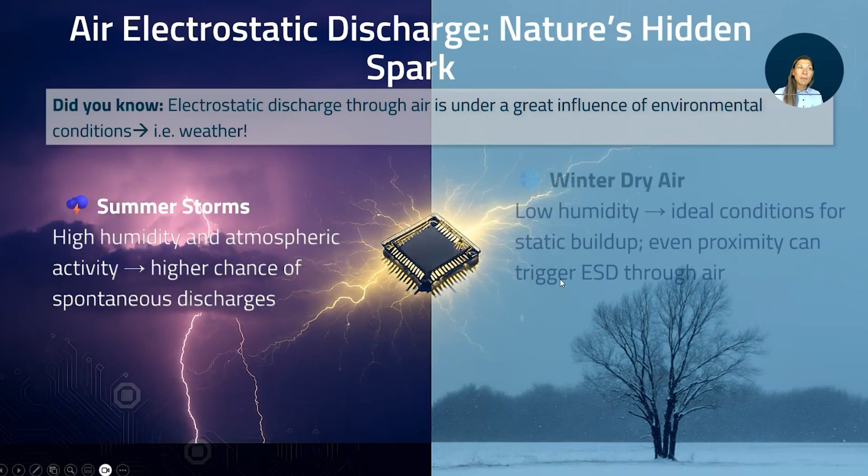Of course, while lightning strikes are quite dangerous, and can actually also be simulated using CST Studio, today I will not be talking about that topic. Today I will dedicate this time more to these kinds of smaller zaps.

If you're especially familiar with the northern climate, during winter the air can be very dry, and that presents ideal conditions for buildup of static charge. In those cases, even a very nearby approach without needing direct contact can trigger electrostatic discharge through the air. While those small zaps are not dangerous for people, unlike lightning strikes, they are devastating for sensitive electronic devices.

Which is why understanding of air ESD is essential for product development, and of course how to tackle the issues caused by it.

I would also like to recommend an excellent free white paper, which can be found on Google, and maybe Mila can also share the link, called Electrostatic Discharge by Dassault. It gives a great overview on the phenomenon and how the ESD gun, the whole ESD setup, is modeled using CST Studio. I will present that during this webinar.

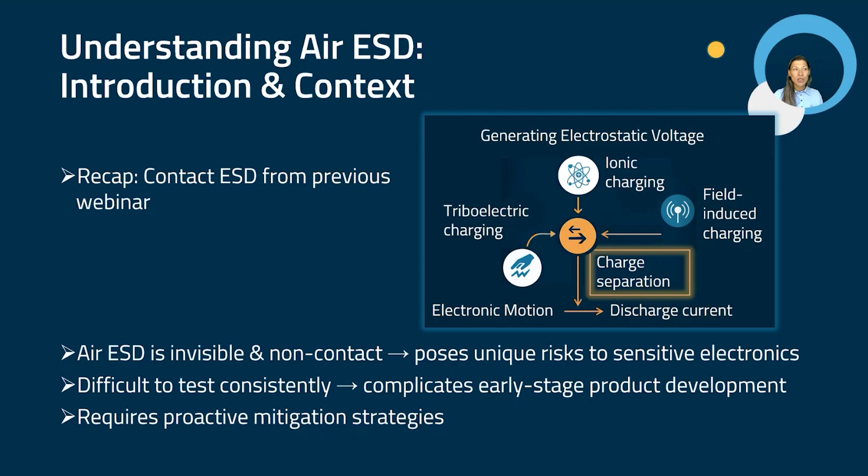Again, briefly on the physics behind air discharge. As already mentioned, electrostatic air discharge can jump across an air gap without any physical contact. And while in the basics, it's similar to contact discharge.

We have the accumulation of charge and potential difference, which means we will have an electric field established between charged objects. Now, when that field strength exceeds the breakdown voltage of air, which is a medium - perhaps you're familiar with solid-state electronics - when that breakdown occurs, it will start so-called avalanche ionization.

Breakdown voltage of air under normal conditions is 3 kilovolts per millimeter. Avalanche ionization basically means there are few free electrons in the air that exist, and they get accelerated by the influence of the electric field that now exists due to this potential difference. They will then hit other neutral particles like atoms or molecules in the air and bump out more free electrons. This starts a chain reaction, which establishes this so-called avalanche ionization, and we will have current across the air, or what we call a spark.

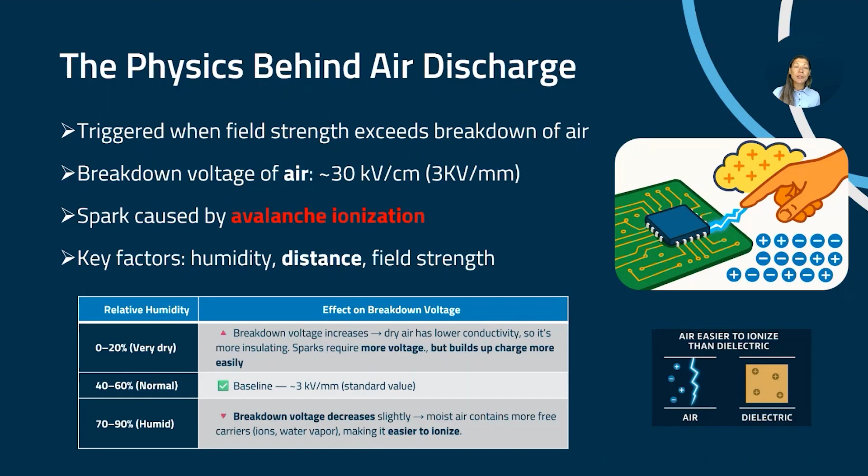So this is just a brief overview of how humidity affects testing of air ESD. As I mentioned, the nominal or normal value of humidity is between 40 and 60%, and then the breakdown voltage of air is considered to be 3 kilovolts per millimeter. However, if the air is dry under winter conditions, the breakdown voltage increases, which means the electric field strength needs to be a bit higher than this nominal value for the spark to occur.

But on the other hand, during dry conditions, the charge builds more easily. Under humid conditions, due to more moisture in the air, we have more free carriers, which is why breakdown voltage slightly decreases, meaning it's easier to ionize and start the avalanche.

Also, air in general is easier to ionize than the dielectric. If you remember, the dielectric will form dipoles, creating an inner electric field that opposes the external electric field from the charge, which is why the dielectric is more difficult to ionize and requires higher breakdown voltage.

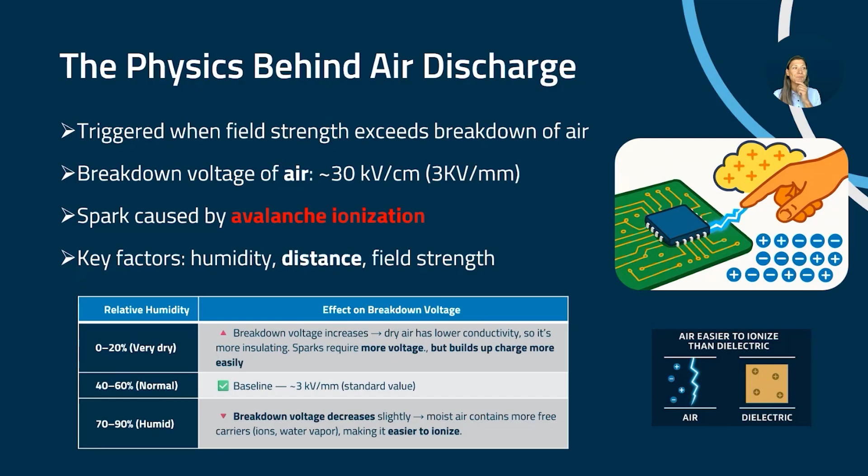Now that we know some basics in the physics, I've highlighted these key differences. The key difference is the mechanism causing it - not direct contact, but avalanche ionization across the gap without physical contact.

Normally the use case in tests is also when conductive surfaces are not accessible, in addition to accessible conductive surfaces or contacts. The trigger condition is the breakdown voltage, which makes air discharge highly sensitive to the environment - meaning less predictable and more variable, which is why it's quite challenging to measure.

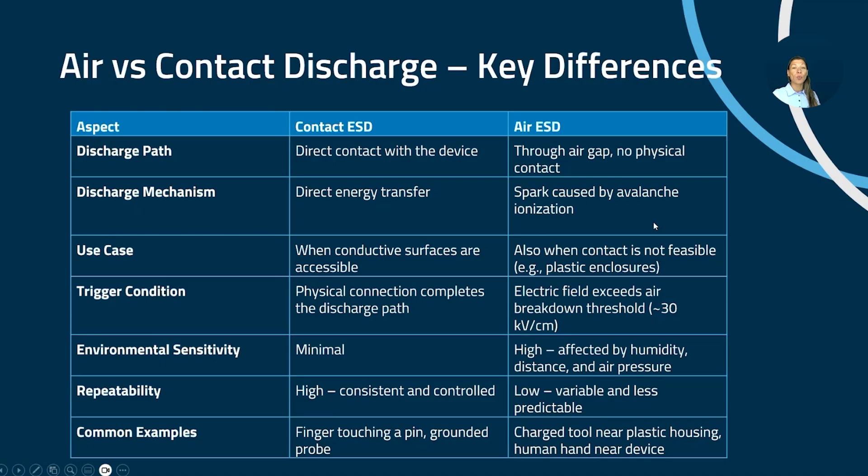When we talk about testing, I'll reference the standard IEC 61000-4-2, which covers both air and contact discharge. Products need to pass both discharge testing at a certain level. These are the main differences in terms of testing, and because of the definition of air discharge, the application scenario will also be different.

We also have slightly different equipment. For contact discharge, a sharp metallic tip is applied directly on conductive surfaces, while for air discharge, we have a rounded tip applied to the outer housing, gaps, and coated surfaces.

Naturally, the protection strategy will also differ because we have an actual physical conductive path in contact discharge - we can use grounding, low impedance paths, TVS diodes, and other ESD protection components. But for air discharge, in addition to that, we need to take care of the environment, applying methods like insulation, shielding, and gap control.

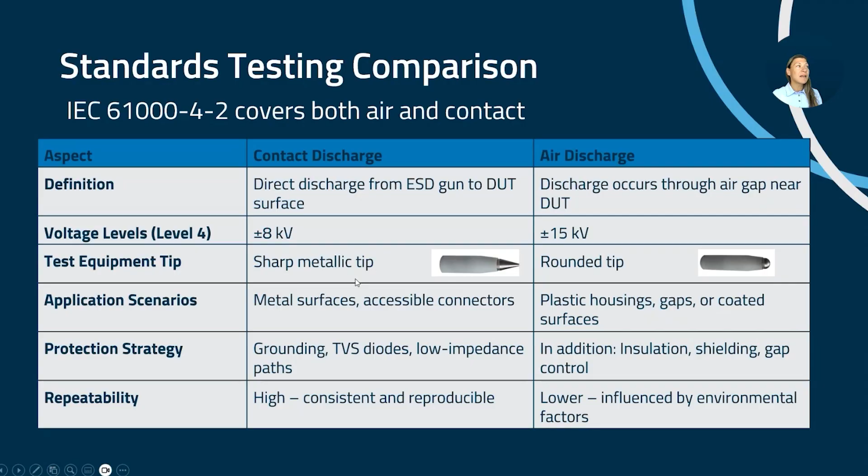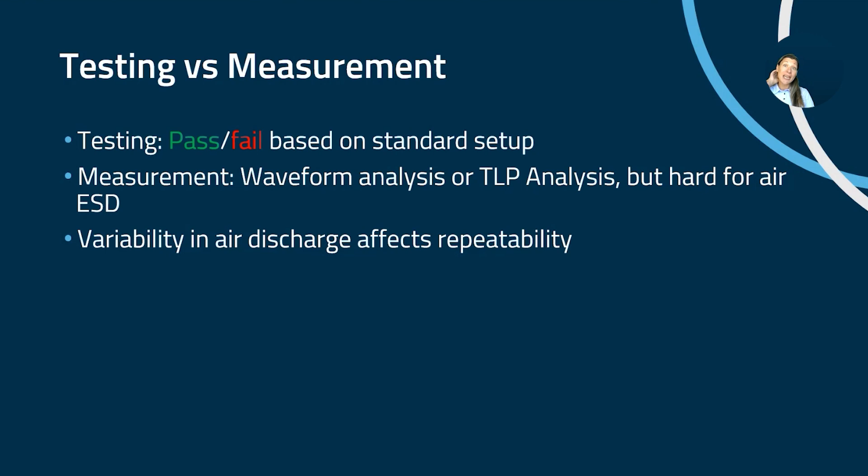However, in the case of air discharge, the high variability due to different factors makes waveform measurement very difficult, which is why testing is the preferred method for air discharge, not measurement.

Just to highlight beyond the compliance requirements, they aim to ensure that a device can withstand real-world ESD events. But in some cases, testing is really not enough to ensure the quality of the product in the long term. So our goal is not only to pass the test, but to have reliable devices that last in the field.

We really need to understand what the main challenges are design-wise, and those are quite often overlooked features—less obvious features like seams, gaps, coatings, and floating parts that often go unnoticed but can accumulate high concentration of electric field and trigger ESD events.

So why simulate? Because, apart from the fact that it's fun, simulation also helps visualize ESD behavior and product behavior and find hotspots and other vulnerabilities of the product design. With this insight, we can improve the design before the final stages of product development and before the testing, saving time and cost of product development.

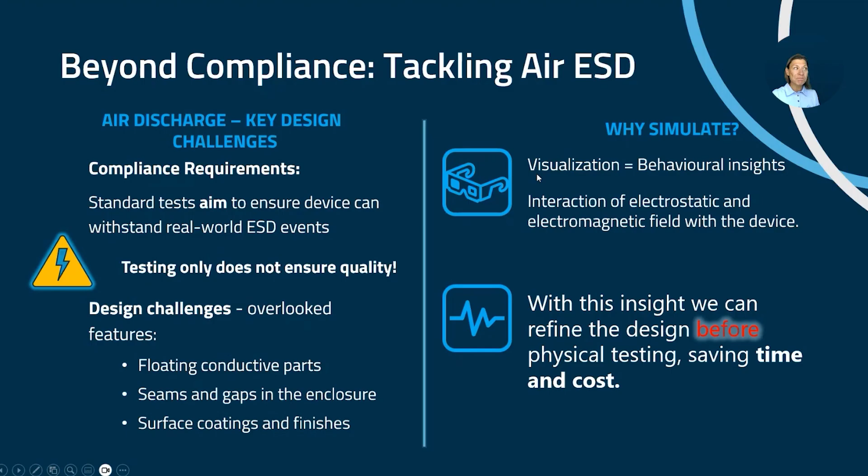So if I've convinced you that simulations are absolutely necessary for air discharge, I'd like to present a three-step approach for simulating air discharge. Step one: as I talked about, the nature of air ESD is that it's very unpredictable, so step one would be to try to predict where the spark location will occur.

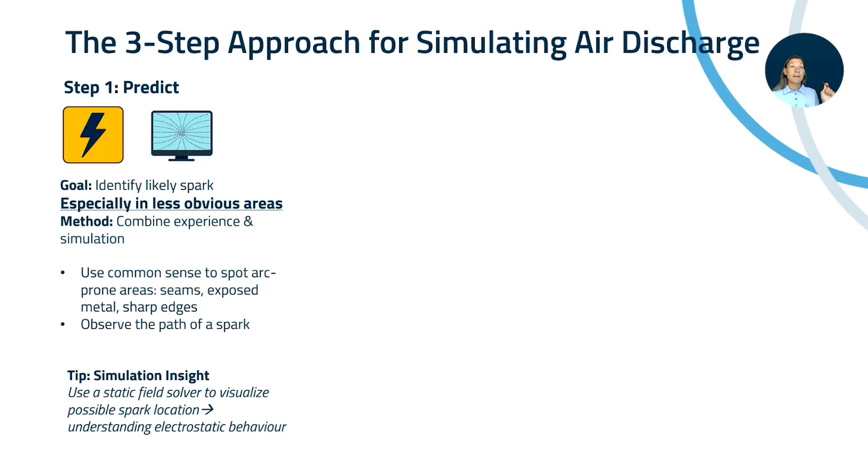Now let's assume we know how to use it and have somehow estimated where the spark will jump. Then we go to step two, where we can quantify the impact that this arc or spark has on the DUT. We can then conduct full simulations where we observe currents, voltages, and electric field distribution, and analyze different scenarios to understand how the spark affects the layout and current flow throughout the device, and see what vulnerable parts of the design we could improve.

Once we've done that, we can continue finally to mitigation. Using the knowledge from steps 1 and 2, we can apply smart design strategies—mechanical, refining the geometry, adding groundings, return paths, and so forth—to tackle the risk of ESD damaging our product.

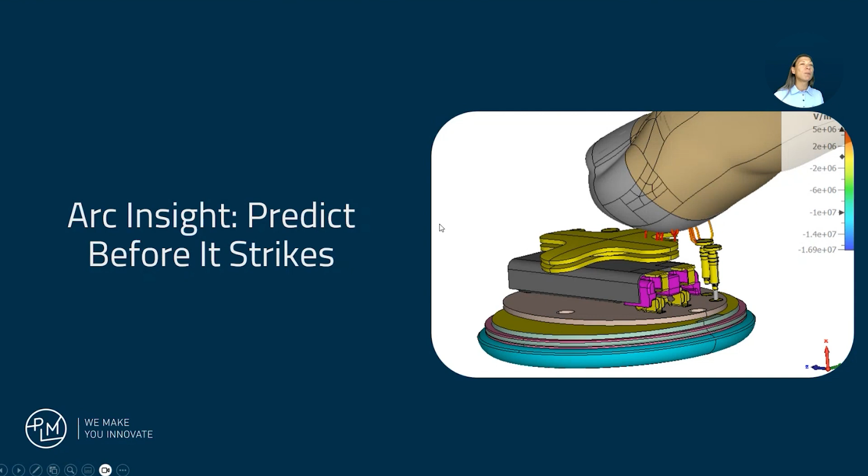So what I'll show next will be step one: how to predict the spark before it actually happens. Before that, I'll just overview the DUT that I'm using in this webinar. It's the same as the one from before, which I used for contact discharge.

This kind of device is inspired by the small wearable devices we're surrounded by nowadays, and presents two sets of challenges. One is that it has metal pins and floating parts that are a common location for ESD events to occur. Then we have a small form factor without any external path for the discharge, which means a lot of energy stays in the system before it manages to dissipate.

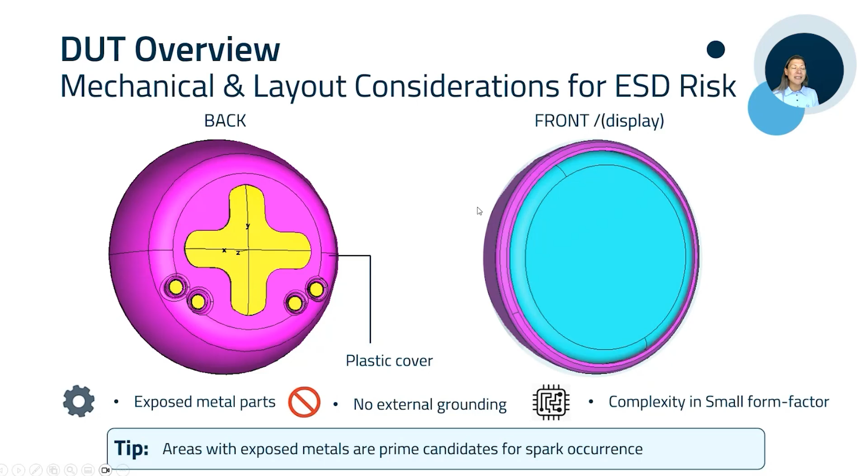So we have the back plastic cover and some exposed metal parts, and on the front we have a display. Then, under the hood, under this plastic back cover, I have this kind of metal backplate, which I'll play with being floating or grounded to see the effect.

I assume these pins would be charging and data exchange contacts. Then we have this battery with two terminals, like a ground and a voltage terminal, and a very simplified display, kind of LCD type, which I also explained in the last webinar. Then a very simple PCB—in the static solver I'll just have a full solid PCB without any layout. This would correspond to the starting phases of the project, where we still need to gather insights to evolve the design.

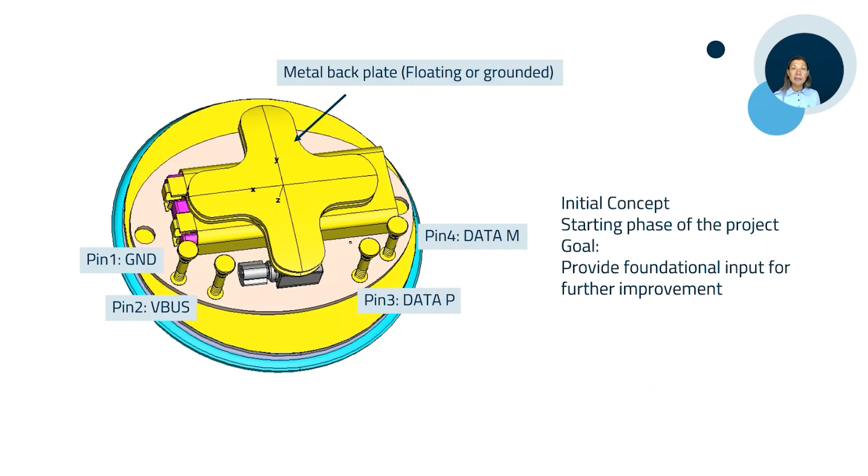Just before I jump into the static solver, I want to say that it is a low frequency solver used for static electric problems. In this case, I use it for spark prediction.

The main task for static solver is to calculate electric field strength and electric flux density, so we can observe the electrical field distribution and use streamline tracing to analyze and identify electrostatic discharge behavior and spark formation.

If you haven't used streamline plots, they are paths that follow the direction of the electric field. In static solver, we can choose field-based seeding, meaning we can select points with high electric field strength, which helps us visualize and assess sensitive areas that can cause the discharge or spark to occur.

More on the static solver you can find in CST help, and there are quite a few examples.

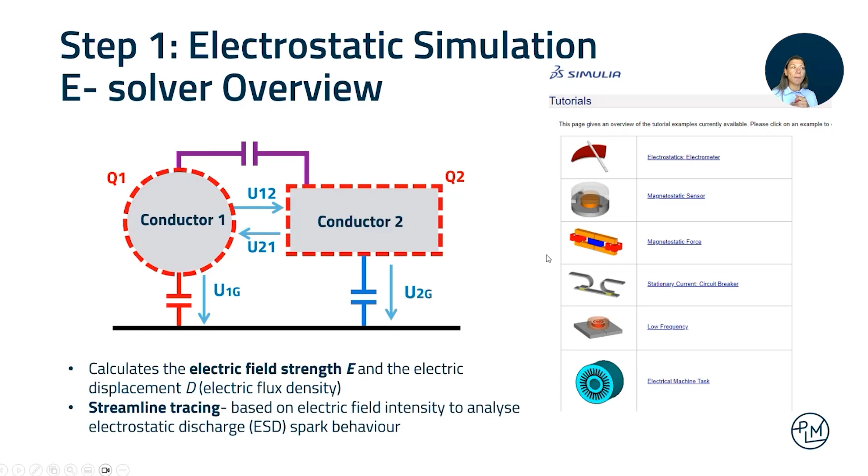Before I walk you through the simplified model, the first step in static solver is to have the model, and from the model to define the sources. Static solver has various options for sources, and in this case I've chosen to use potentials as source type.

Here I have as a source potential the fingertip. In a real scenario, this could represent something like the tip of an ESD gun, and it's only for illustrative purposes.

To assign a potential source in the electrostatic solver, the material needs to be assigned as PEC. So all these potentials here have to first be PEC.

I have also assigned the PCB to 0 volts because it represents a ground potential and is connected to the battery. Now we have the pins, which I have assigned here.

V bus is the second pin. The first pin is grounded as in the description, and the second pin I have assigned as V bus. Normally it would be maybe 3.8 to 5 volts, so I have assigned 3.8 volts, and those other pins are actually floating.

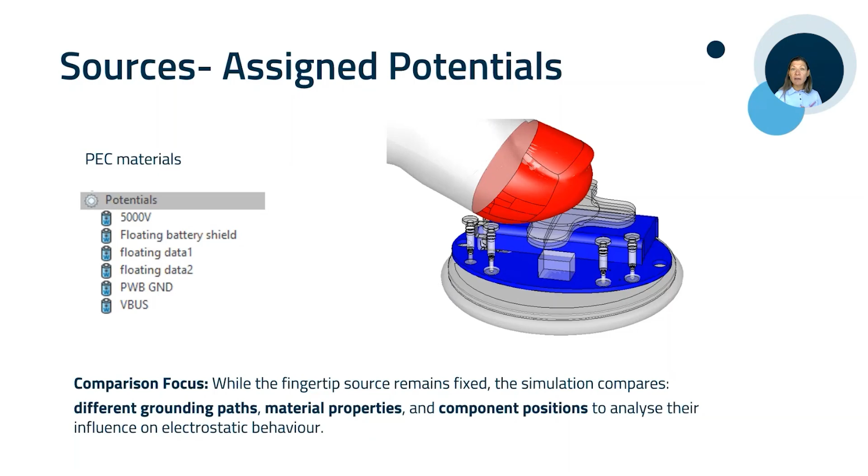Now speaking of comparison, the focus is to keep my source in exactly the same location, so the finger is kept in the same place. What I will do is vary different grounding paths, material properties, and position to explore how geometry and those factors influence electrostatic behavior.

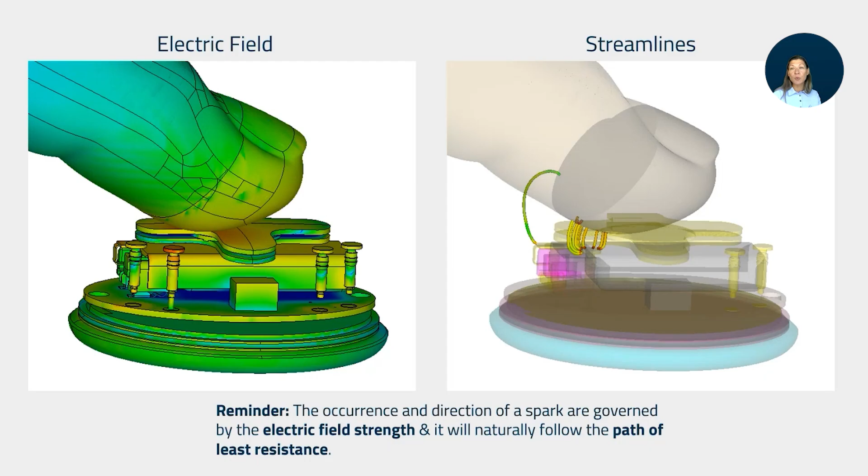We will observe electric field distribution and the streamlines. As a reminder, spark formation is governed and determined by electric field strength, and the spark will always follow the path of least resistance. It depends, as we will see, on geometry and also on the materials, which reflect the ionization.

But let's go hands-on in CST, and I have already opened my model. I hope you can see my model as well. Yes, we can see it.

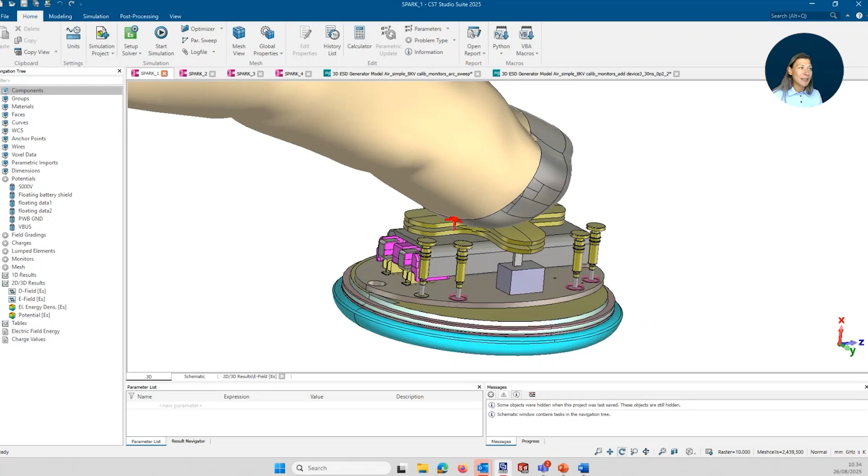Great. So in this first baseline, I have this finger that I've taken from the phantom hand, and I've just selected this tip of the finger to be my source, so PEC.

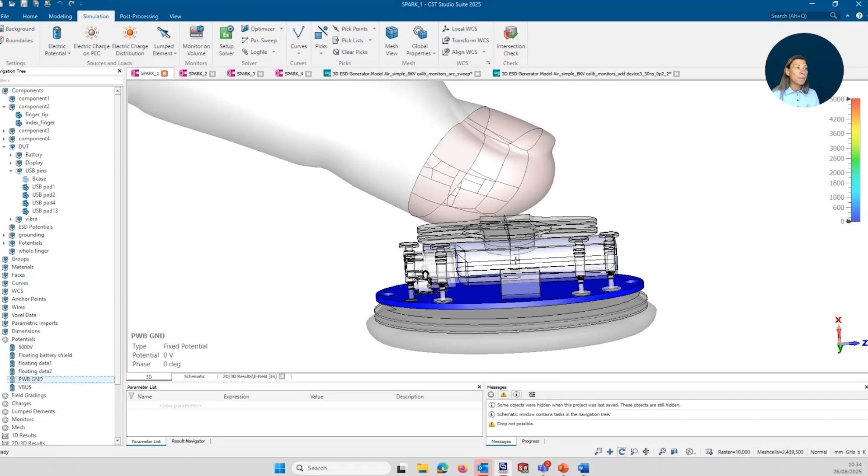Here we can see the sources and the way we can select from different types of sources in this solver. So PWB ground, my PCB is a solid PCB to ground, then I have these two pins that are floating, and we have V bus, which is 3.8 volts.

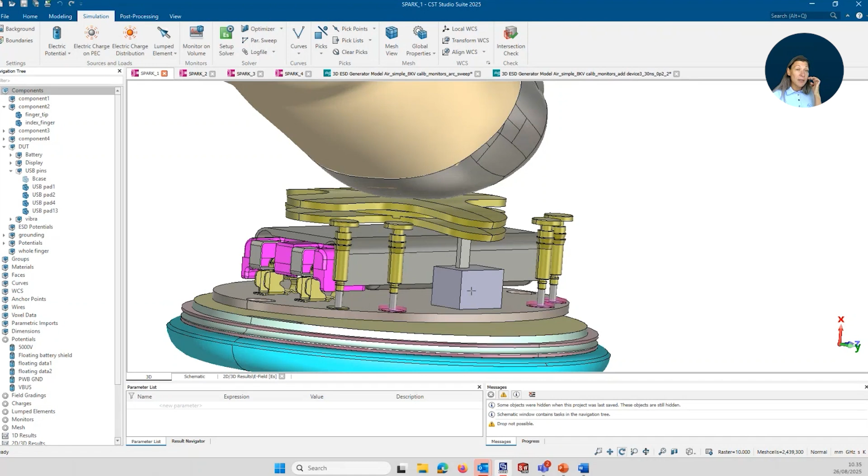Now, before we simulate, I want to highlight that initially I have grounded this back metal plate indirectly, via this block that represents a vibrator and this kind of block contact. The battery contacts are also grounded through the PCB.

Static solver operates entirely in DC, and it disregards the dielectric dispersion properties, so the permittivity is not frequency dependent. And I have some other parts.

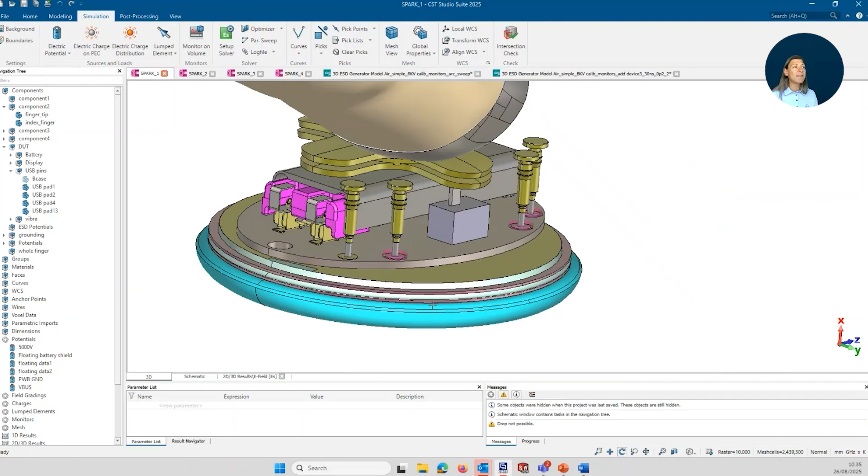In the setup of the solver, we can also use adaptive mesh refinement if we need. In the specials, we can set that PECs without sources are assigned as floating, so initially they are free of charge before I start the simulation, and the open boundary, which is also charge free.

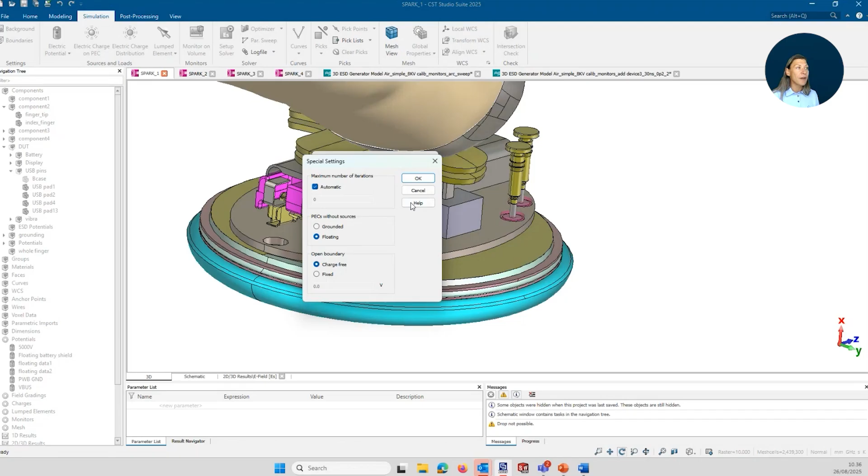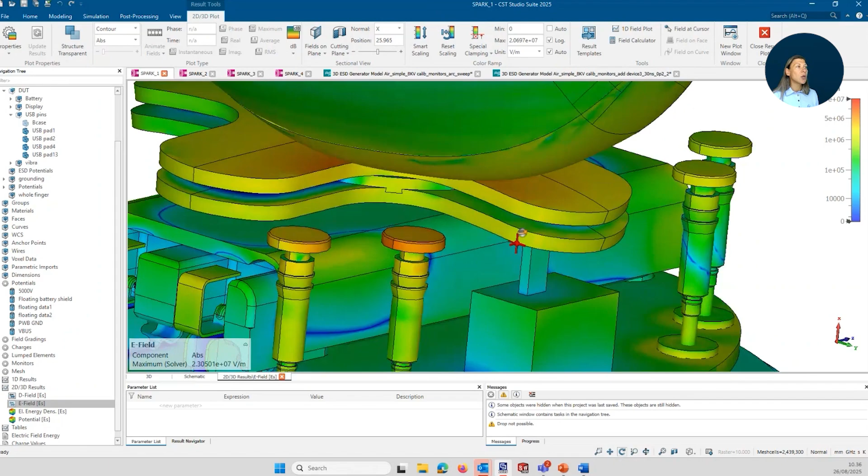So I've pre-simulated, and now I will show the electric field. I use the smart scaling option, and based on the colors we can also check the field at the cursor. We don't have to, but based on color we can notice where the highest electric field strength or even the density flux can be observed.

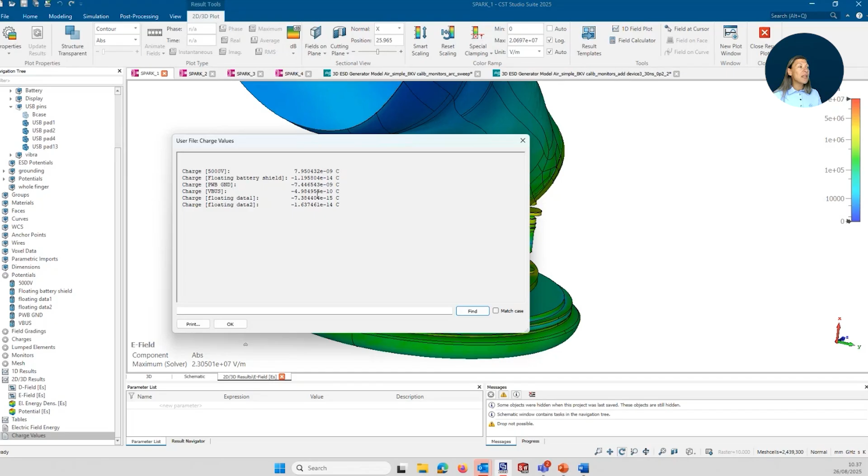Another useful piece of information, before I go to streamlines, would be the charge. These are the corresponding charge values to these potentials. We can see that our source, the 5 kilovolt potential, has this amount of positive charge in coulombs. The PWB ground has almost the same, but not exactly, amount of negative charge. The V-bus, which is exactly this second pin here, also has a significant amount of charge. Then we have this other floating part, like the battery shield, which has a much lower amount of charge accumulated.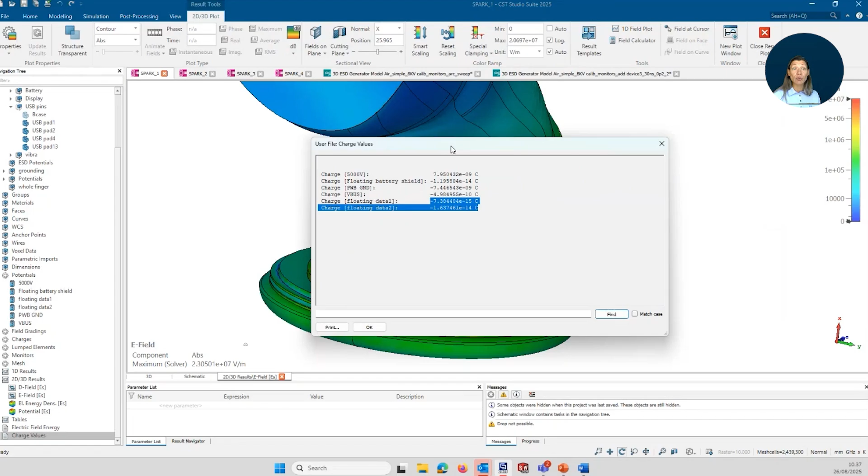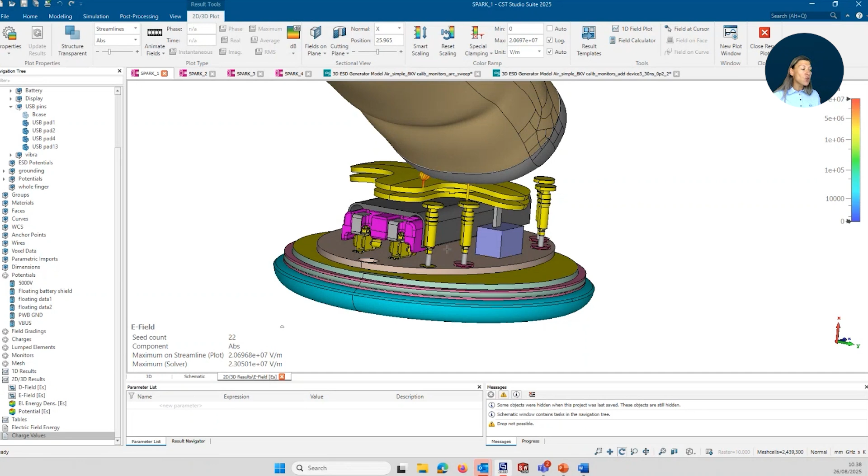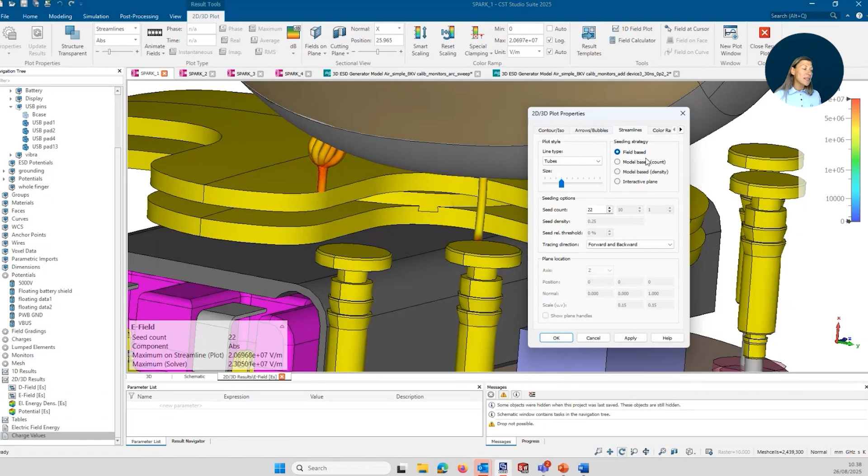Based on this, we can now set up our view. If you've used streamlines before, they are paths that follow the direction of the electric field and show where the electric field is strongest. So we can visualize important areas, including those less obvious regions. In properties, we can set up the plot style for the streamline - they can be lines or tubes. In this case, I'm choosing this field-based seeding strategy, which means it selects the points with the highest electric field strength.

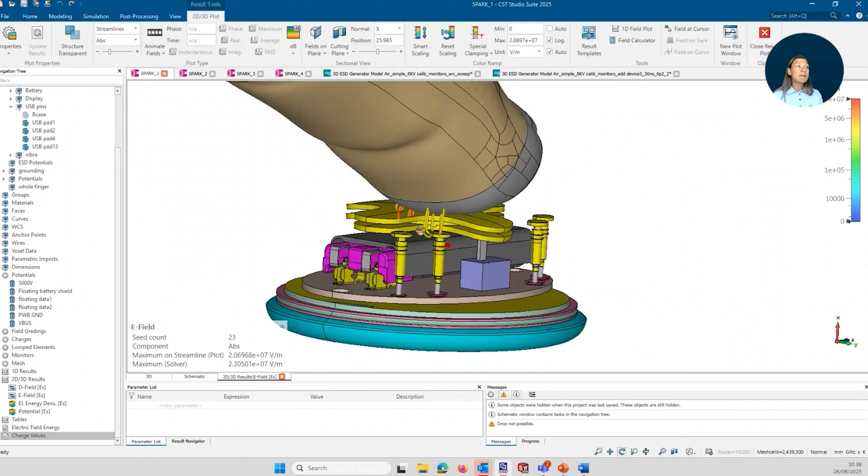We can also play with the number of seed counts, which gives a higher number of streamlines. I'll leave it as this. From this, we can say that the most probable spark location, where the electric field is strongest, will follow the path of least resistance - through this back plate, it will go to the ground, and also to this V-bus contact.

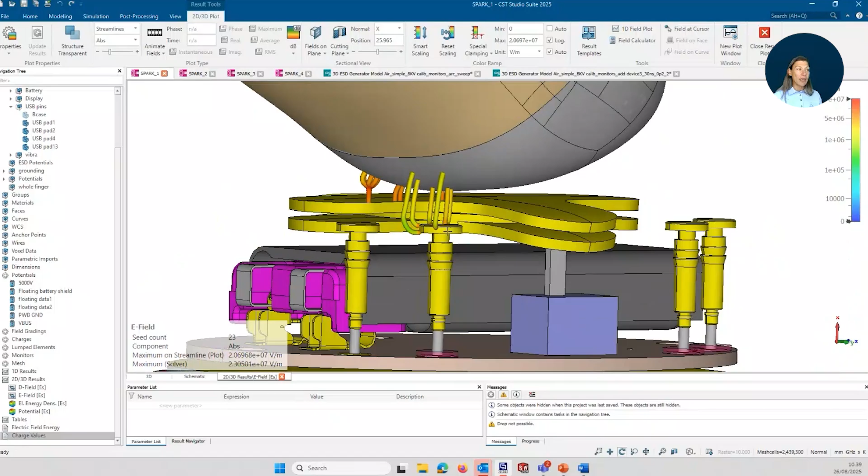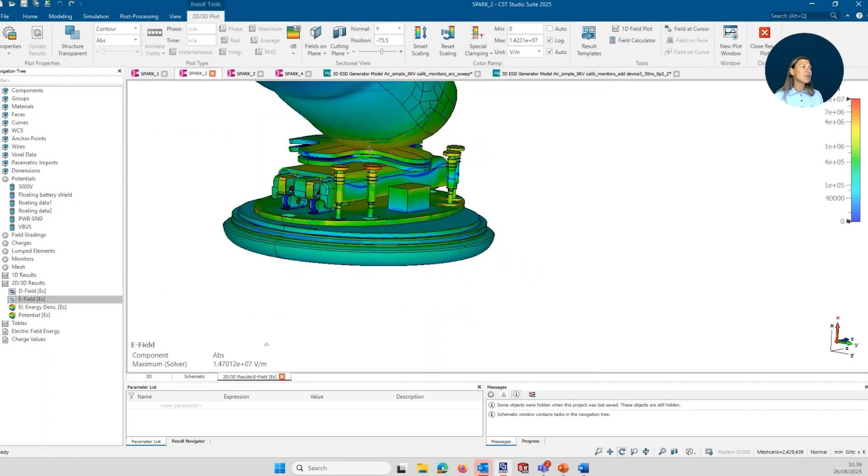Now for comparison, I leave everything else exactly the same, but I've removed the grounding from this back plate to see what the charge distribution will now be. I've done the same simulation, and we can see that now this V-bus is even more intense. The scaling is perhaps a little different, but we can clearly see that the highest electric field strength will be on this V-bus contact.

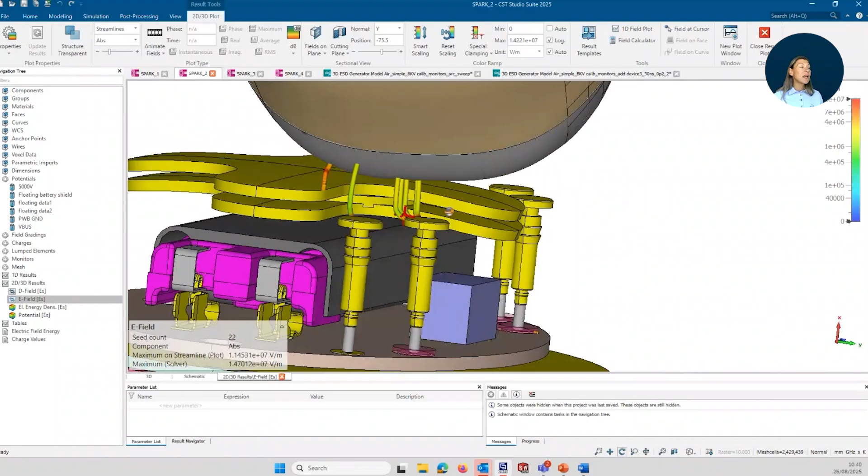And if we again visualize using streamlines, we can see that here we have only one streamline going to this floating plate, but more are going to this V-bus and even to this grounding contact. So just one little detail changes the entire situation when it comes to charge distribution and therefore the electric field.

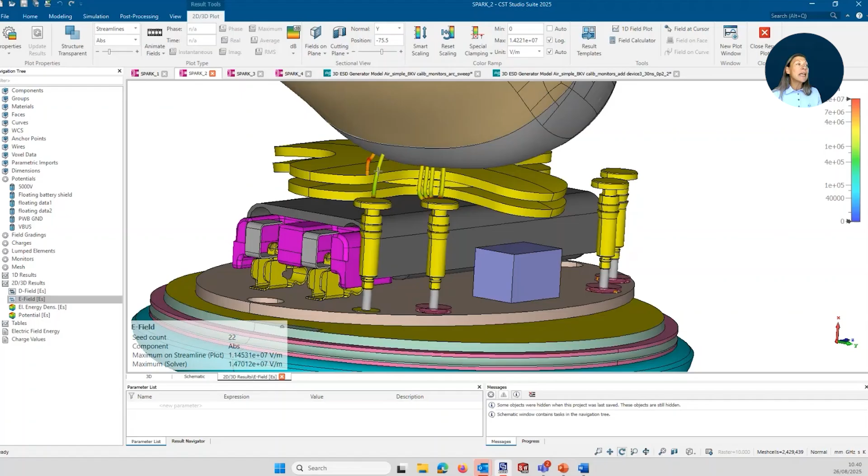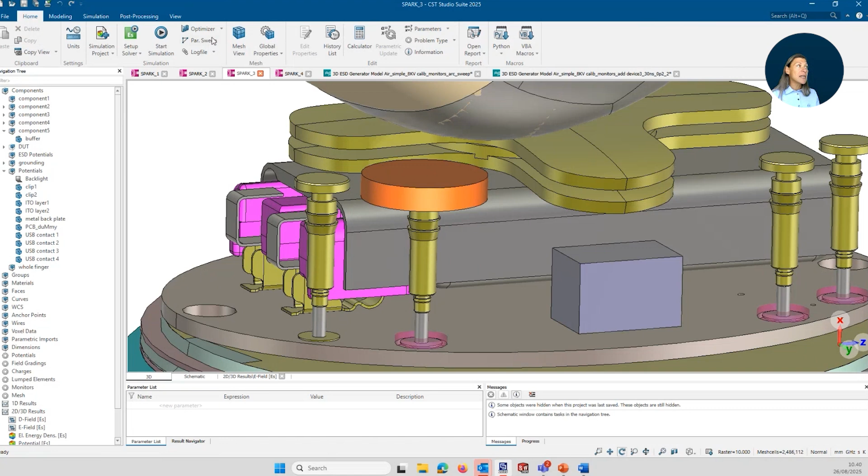Now, in this third setup, I've put in a kind of dielectric buffer, a small buffer material with a dielectric constant of 10. I want to see how that will affect the electric field. No surprise, but let's hide this.

We can see now that, with quite a similar scaling, the strength of the electric field on this pin is much lower than before. We can also compare the fields on the plane.

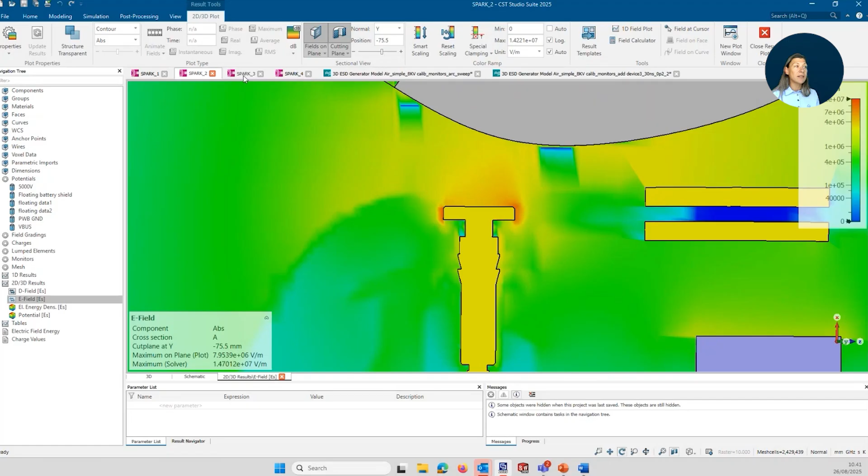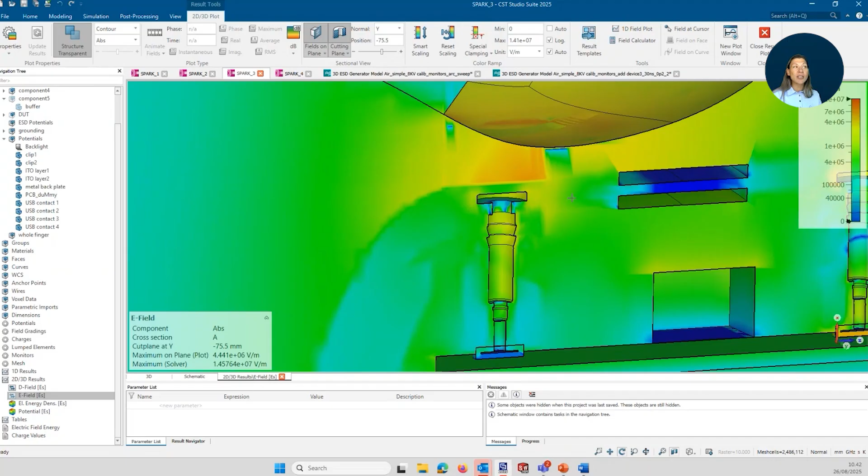Instead of that, we can check and choose the cutting plane. We can see that here, especially on the edges of this pin, we have a high value of electric field. In this case, we notice that just by adding this material, it decreases the electrical field. So we can see how we can sometimes combat this spark occurrence, where possible. In real products, if you need charging contacts, it's not always fully possible to add this kind of dielectric, but this is just for studying the phenomena.

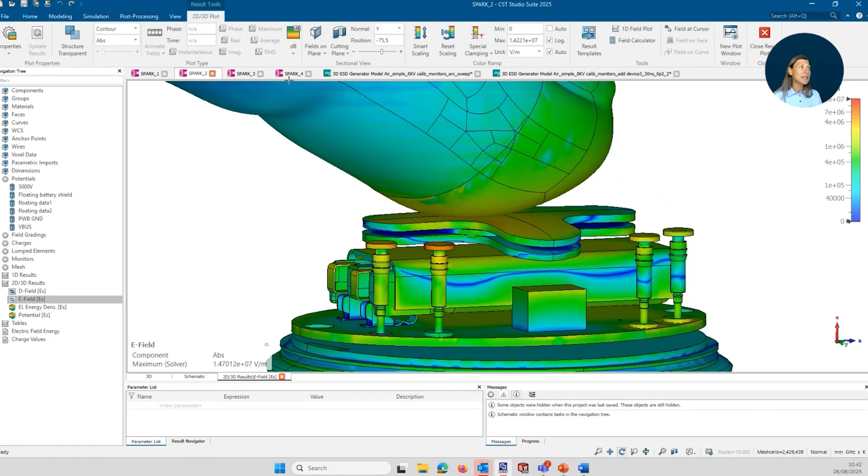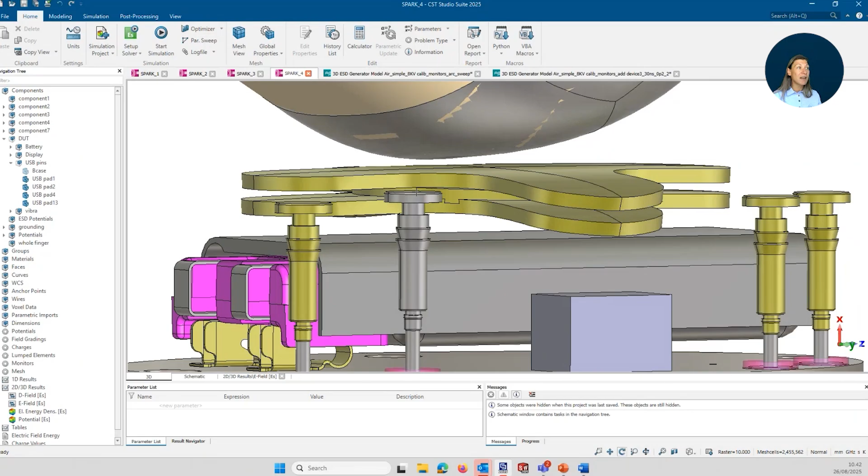Finally, in this case, I've removed the padding, so it's comparable to the previous case. I've increased the location of this V-bus pin by 0.4 millimeters. The shortest distance between the source and this metal backplate is only 0.5 millimeters, and here I've lifted it by 0.4 - quite a small difference.

We can now see that the streamlines show that just decreasing the distance between the source and this pin has increased the probability of the spark forming at this location. Now, of course, we can have as many of these as we like.

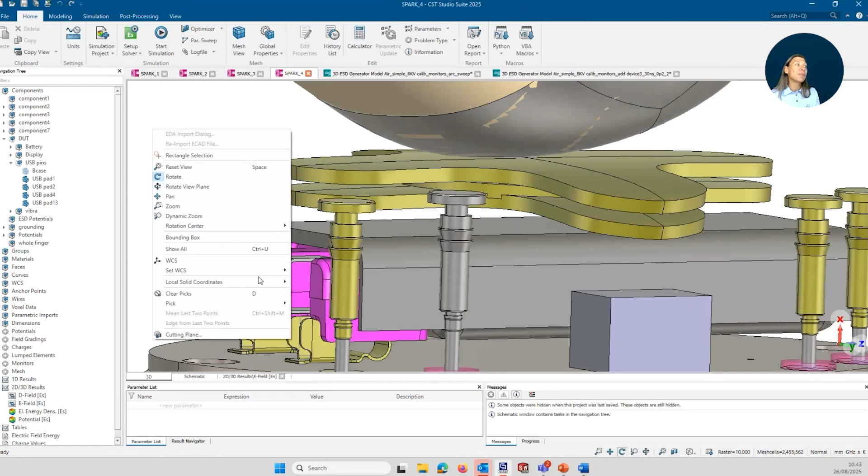So I have just given one example of one position of the finger, and there can be infinite possibilities for that. But we can see that if we would bury these contact pins deeper into the plastic, we would actually not be able to access them, and the air discharge would not occur so easily.

That's why in modern connectors, if we think about USB-C type, those contact pins are not even visible anymore. They are so deep into the mechanics that they are not exposed to external contact or even air discharge. Knowledge is power, so based on these kinds of simulations, we can make better decisions and evolve our product in a timely manner.

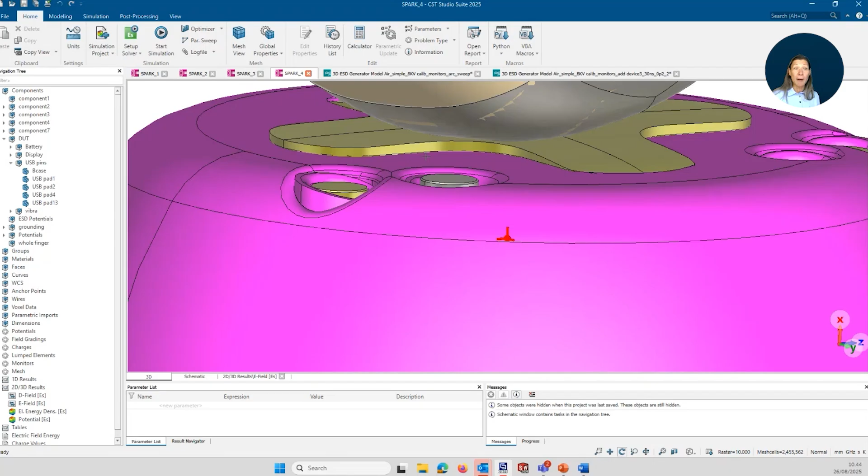So let's assume now that the most probable spark location will happen on this V-bus pin, but of course it can also happen on those other pins. And we can continue now to step 2 of this webinar.

But before I continue, to conclude from this static solver: we can see that the geometry of the elements and the grounding configuration affects the spark affinity. What does it mean? It means the tendency to initiate and travel towards a specific location based on the electric field distribution in the overall model, and of course depending on the path of least resistance.

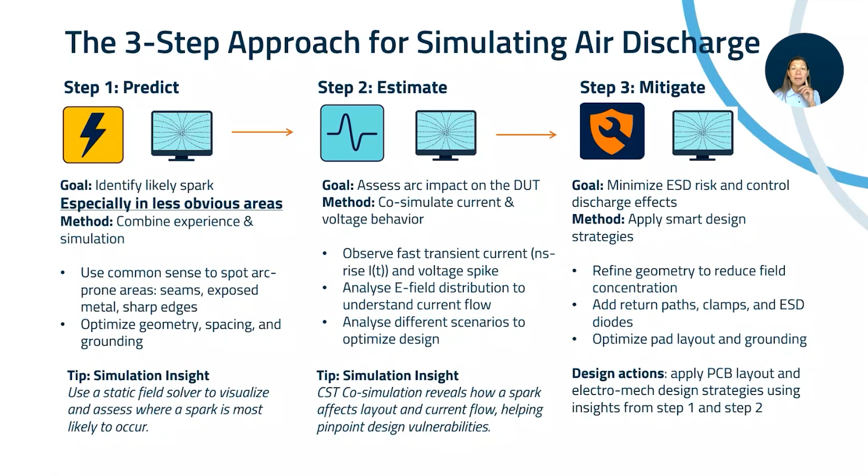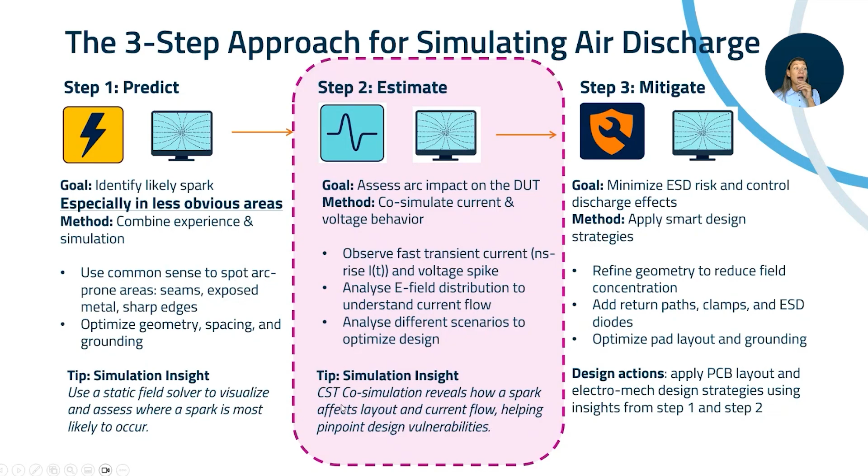Now, again, assuming that we now know where the spark will occur, maybe at some gaps or those metal pins, the next step is to understand how it will affect the layout and the current flow. And we can do that by performing co-simulations in CST Studio, which I will now briefly explain.

Similarly as in contact discharge, co-simulation combines full wave 3D simulation with a circuit simulation. In this case, I'm using the TLM solver for 3D simulation. And in case of air discharge, the excitation is implemented on the circuit side, which also includes a non-linear arc model, represented as a SPICE model.

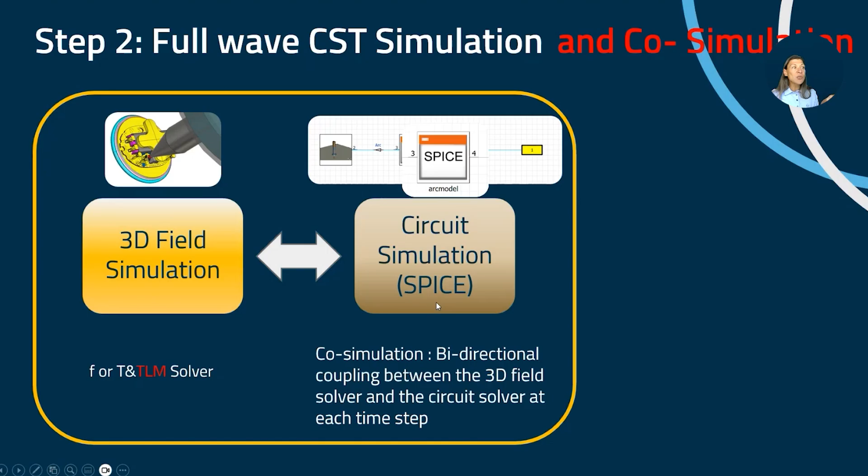So this way, basically, we simultaneously solve Maxwell's equations in 3D and the arc resistance equations in the time domain to estimate these currents and fields for a given model geometry, but also arc length and ionization constant. I will show soon how to do it.

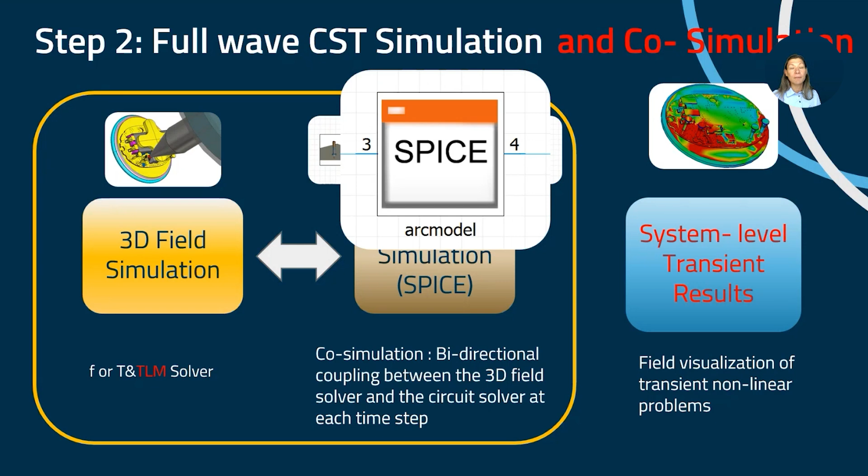So first, I will guide you: the air ESD gun can be found in the component library. And using the model of the gun, we can also simulate the influence of varying parameters, such as arc length and ionization constant, on the waveform characteristics during the discharge event.

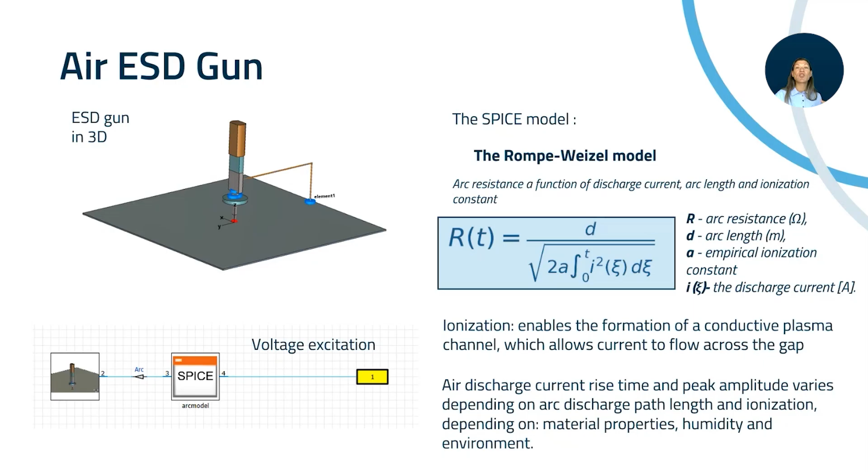So the air ESD gun here is quite similar in 3D to the contact discharge model, but we have this arc model added to the voltage excitation. The SPICE model is basically the Rompe-Weizel model, which calculates arc resistance as a function of current, arc length or the distance between the source, and ionization constant. I talked about avalanche ionization because that determines how fast this conductive channel will occur in the medium.

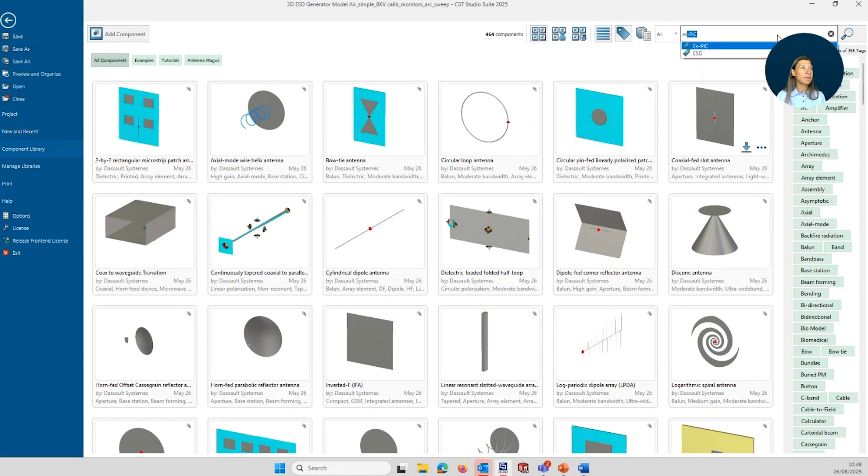I will then come back to this slide. Let's quickly go to the actual sweep of that gun. So as I explained, we can go to the component library, and if we search ESD, we can find this model of the generator or the gun.

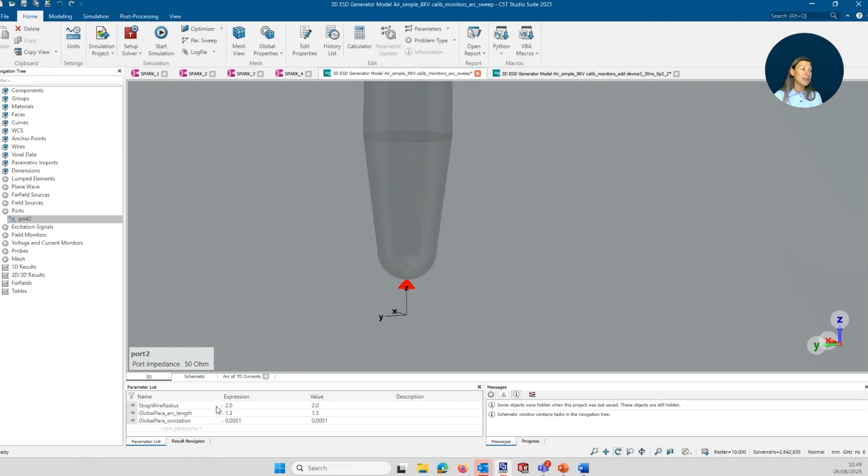It looks quite similar to the contact discharge gun, with the difference that the tip is a little bit larger and rounded. The source port actually has a variable length, which is also this arc length—I have parameterized this arc length. So to build a full model as in contact discharge, we can also vary the strap wire radius.

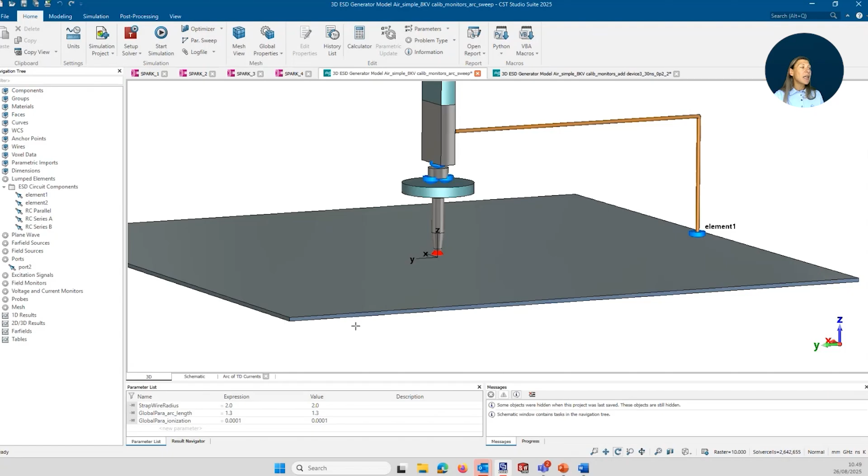In my case, I've left it default, and I'm using an inductor to ground of 600 nanohenries. But in the schematic on the circuit side, we already have some predefined tasks in this model of the ESD gun. These tasks already have the excitations, and I'm using an 8 kilovolt excitation case. We can then start this CST transient co-simulation from here.

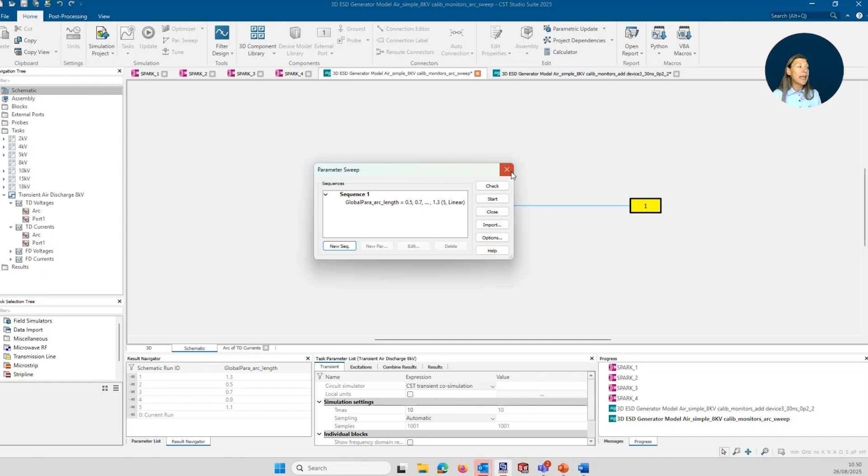I also have those two variables, and in this first case I will sweep the arc length from 0.5 to 1.3, and I have already resimulated it. So this is the port 1 excitation of that 8 kilovolt discharge, and this is the arc.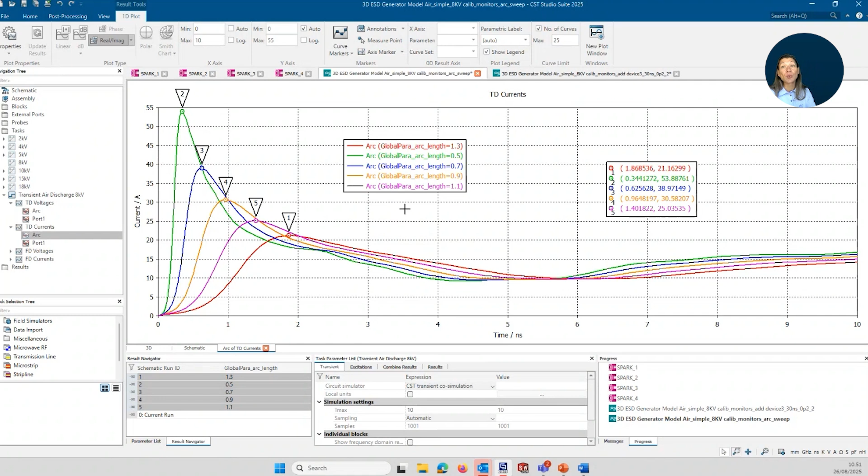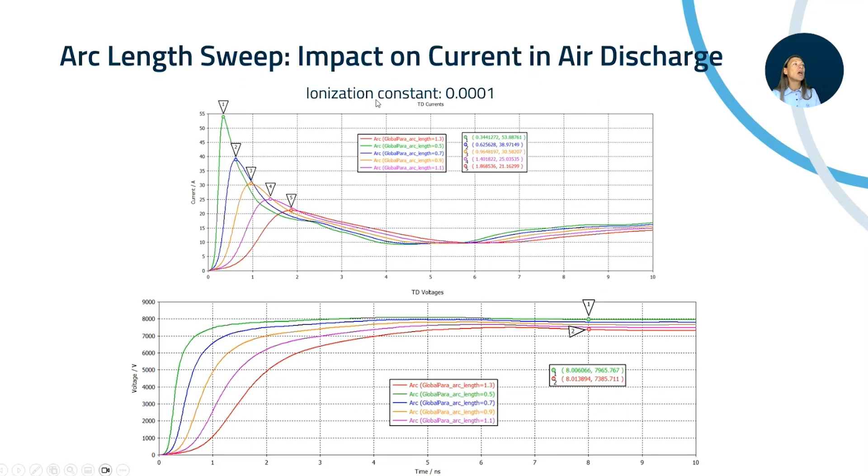Going back to this presentation, I have already pre-simulated the ionization constant effect. I kept a similar arc length of 0.7 and swept the ionization parameters from 0.00005 to 0.0002. We can see that increasing ionization constant means faster breakdown, the arc forms more quickly across the gap, and we have higher peak currents. That means the discharge becomes conductive sooner.

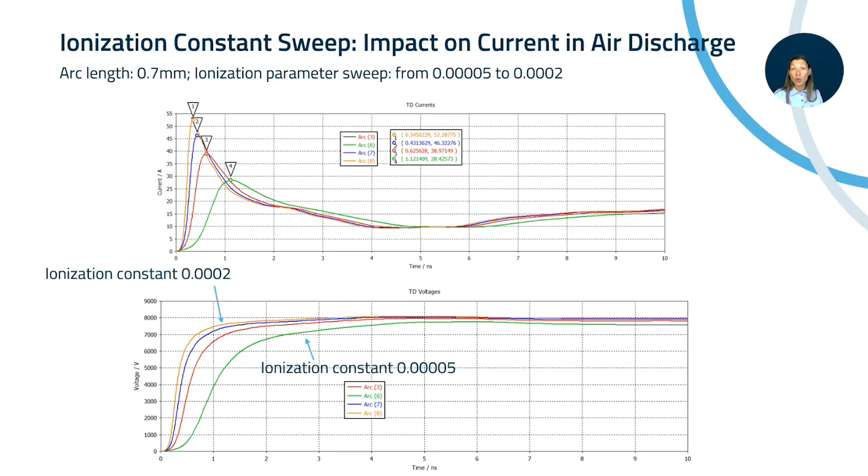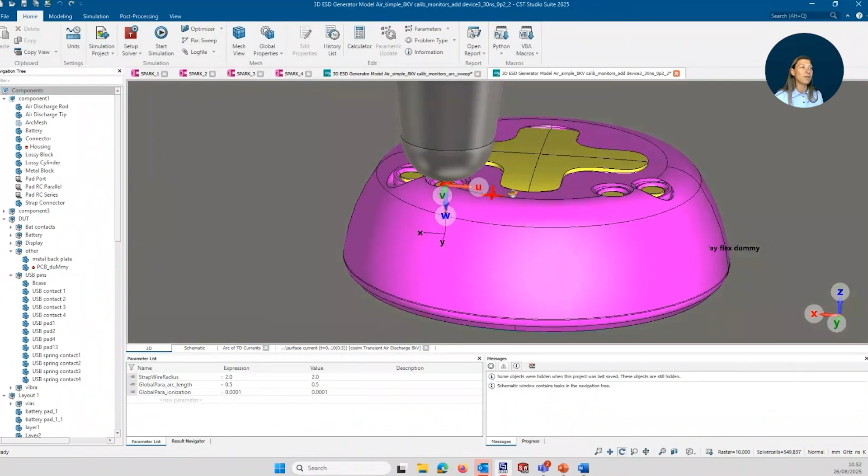Of course, this webinar wouldn't be interesting if I didn't have a final simulation on this small DUT model. So here, as promised, I have simulated this on the V-bus, and I will now hide the components that are not relevant for this case.

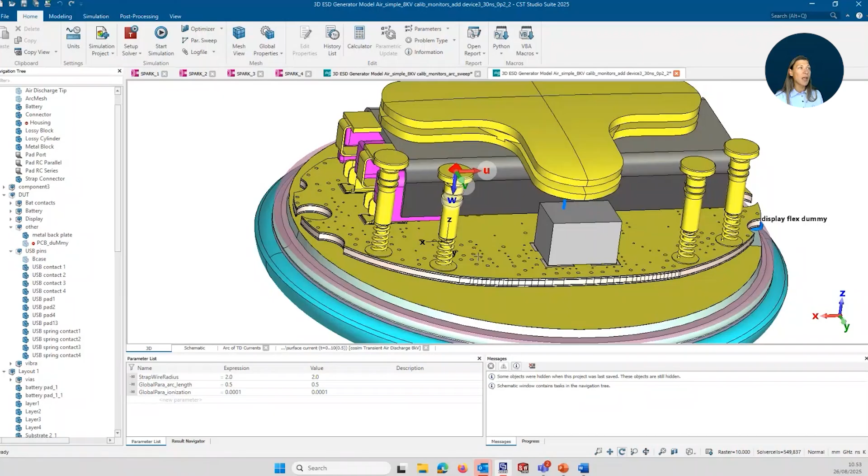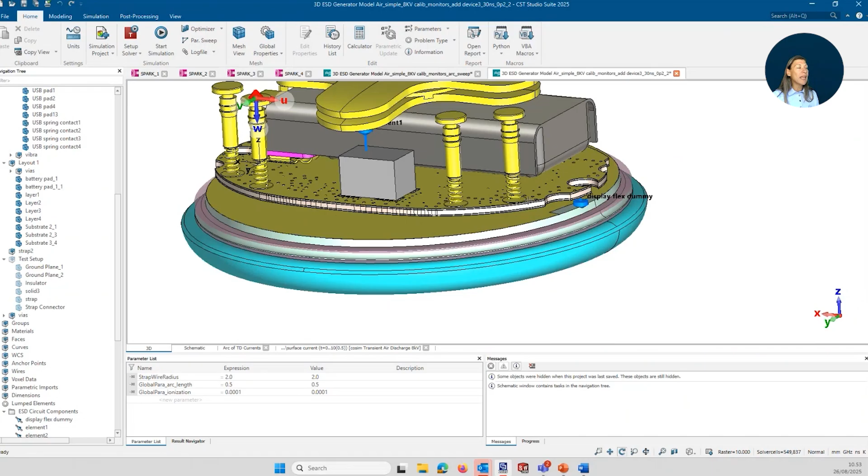If you remember from the contact discharge, I have this very simplified model where this backplate is now grounded through a 1 ohm resistor. And here I have this kind of dummy display impedance, which basically means we will have some connector that will go to the display. I have a very simplified layout with only some vias, so the conductivity is not so refined.

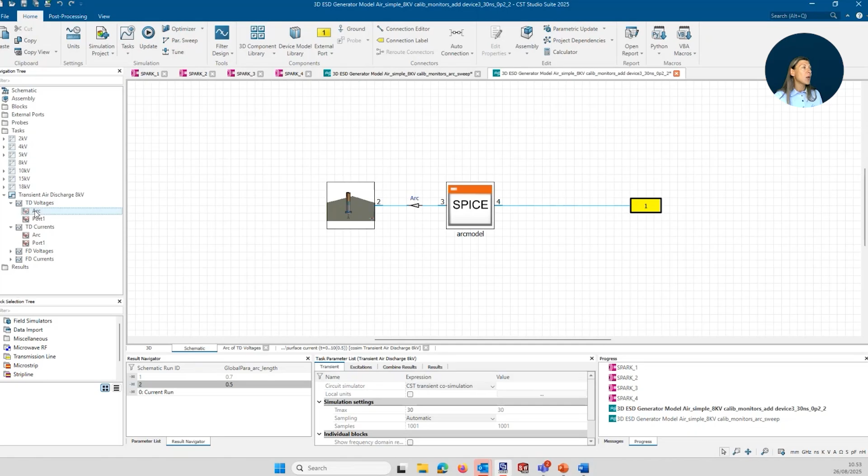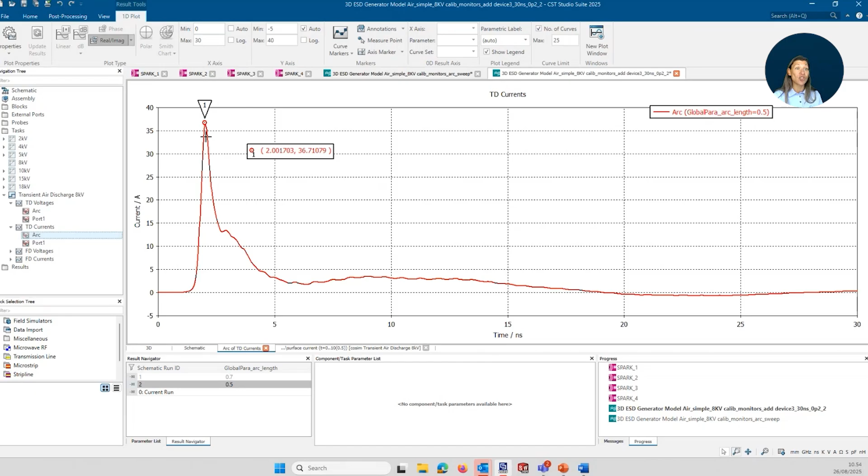I will just hide the dielectrics and the substrate. Here I have conducted the co-simulation, and I put my arc length at 0.5. We can see the voltage and also the current rise. I put a delay of 1 nanosecond, but the current goes very fast, and it goes higher than the contact discharge case. Now, how that will affect the device, I can see from the 3D results of my co-simulation.

One of the most important pieces of information is the surface current. We need to place some monitors so it would be visible for us. Here I have visualized the surface current. This is the maximum, but we can also visualize the instantaneous value and maybe use some smart scaling.

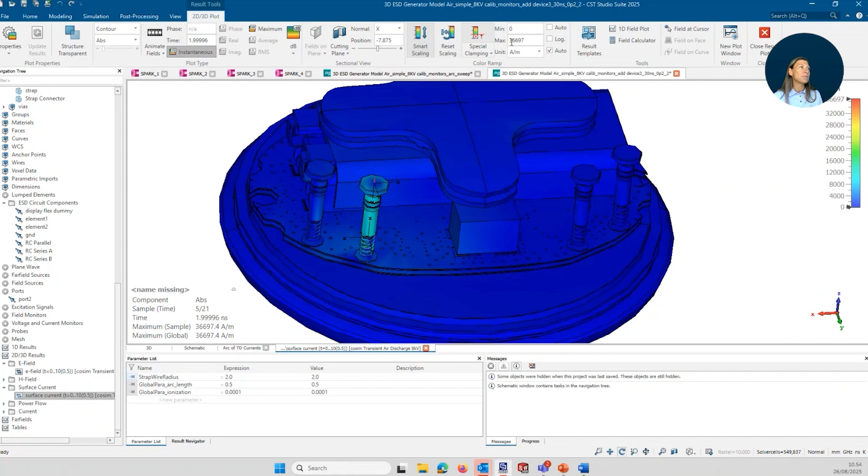So we can see that at 2 nanoseconds, let's put some 1000 amperes per meter. At 2 nanoseconds we can see, we can also animate it, but we can see how it spreads and how it dissipates over time. If I take 3 nanoseconds, it has already dissipated quite a lot. For the worst case scenario, I always like to observe the maximum value, meaning the maximum value everywhere during these 10 nanoseconds.

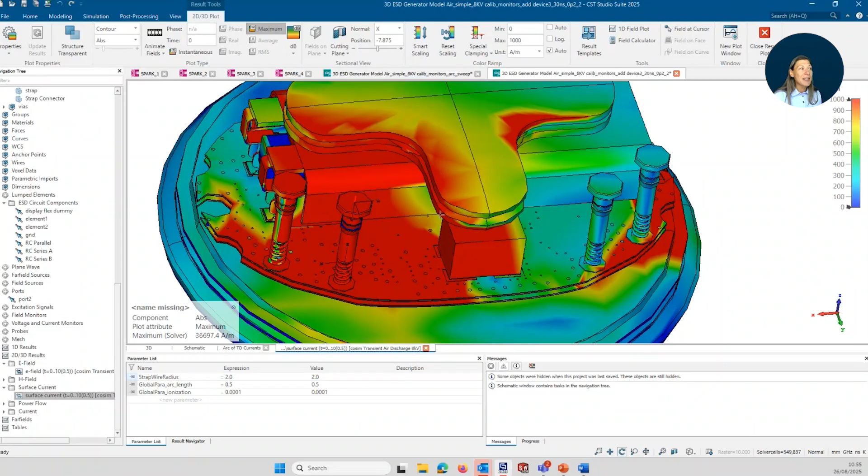Based on this, we can make some design choices. I can tell you a few things I would do and wouldn't do to refine this design. First, I wouldn't put any sensitive components in the vicinity of this V-bus, but we could also perform a similar simulation on these two data pins. So definitely no sensitive components in the vicinity. I would also leave as much ground as possible so that this discharge would dissipate more easily.

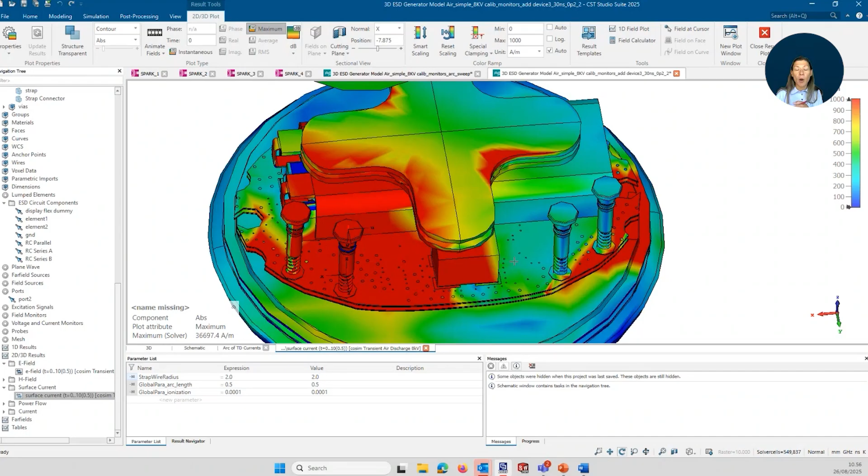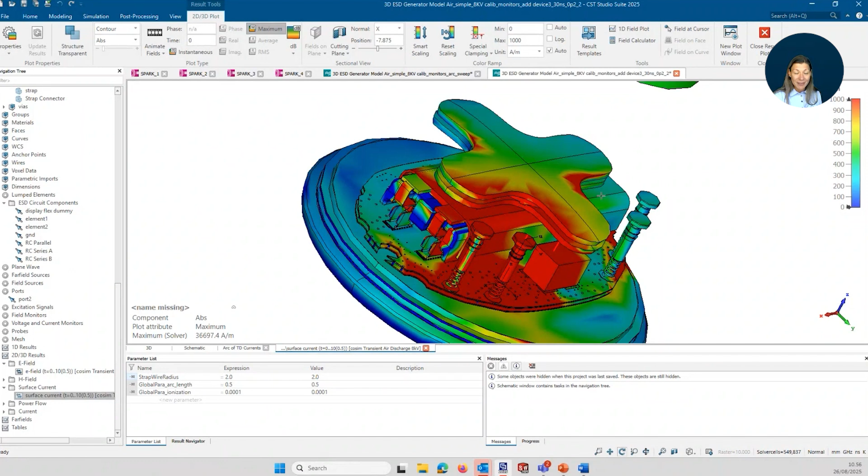When you build a layout, you want to divert the discharge current from any sensitive components. From here, we can see that quite a lot of discharge current will also go to this dummy flex, which perhaps means that a smarter location for the flex connector would be somewhere on the other side, where this effect of discharge would not be so great.

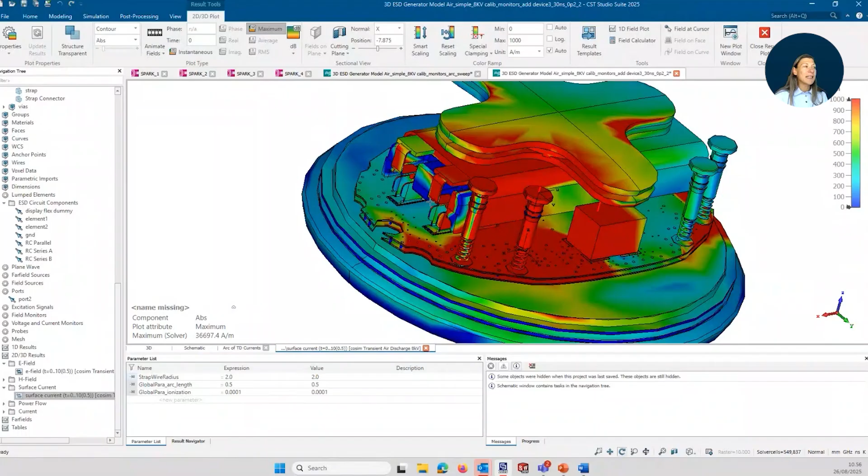Also, I wouldn't put this first battery contact to be the power, so to 3.8. I would rather leave this to be ground, and assign the other one to be the higher voltage. But anyway, as I said, many people can make their own conclusions, and probably more can be made. The main point is to have this kind of iterative approach where we can improve the design and simulate with every iteration for the best outcomes.

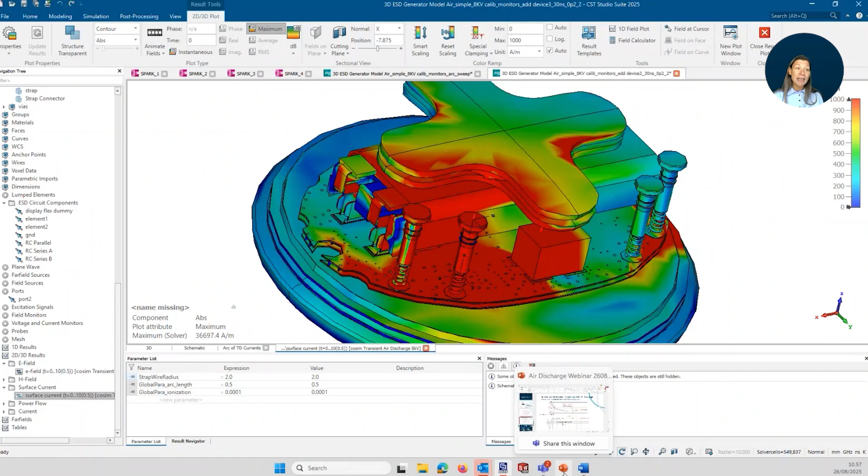Now we are so close to the end, so before we go to questions, let me give some final thoughts. As the air discharge is such an unpredictable challenge, it is hard to replicate in physical tests. It poses quite a high danger for product development because it's commonly noticed in the late stages of product development. So the best way to be proactive is to use simulation during the product development phases to optimize the overall design. My approach to this webinar was to show you how it would look in some simplified but more realistic scenario, and where we can identify different coupling paths and simulate different mechanisms using a transient solver.